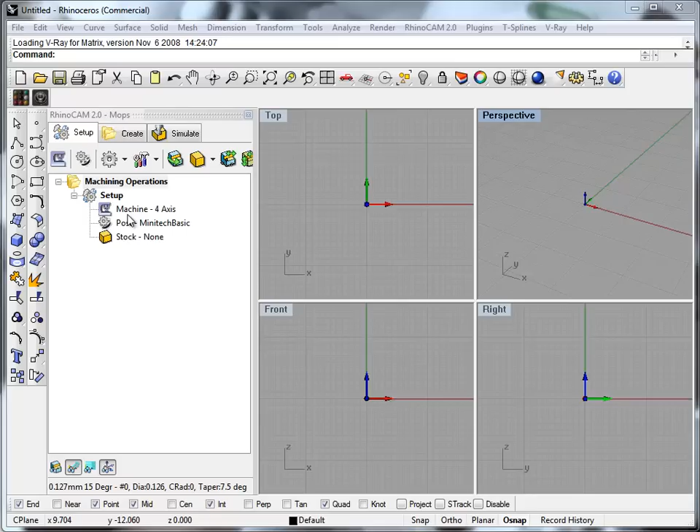Hi Brian, just a quick little video for you because I know that you'd probably be a little bit daunted trying to set up RhinoCAM on your own there up in Canada. I've just literally reinstalled this on this machine. It didn't have it on yet.

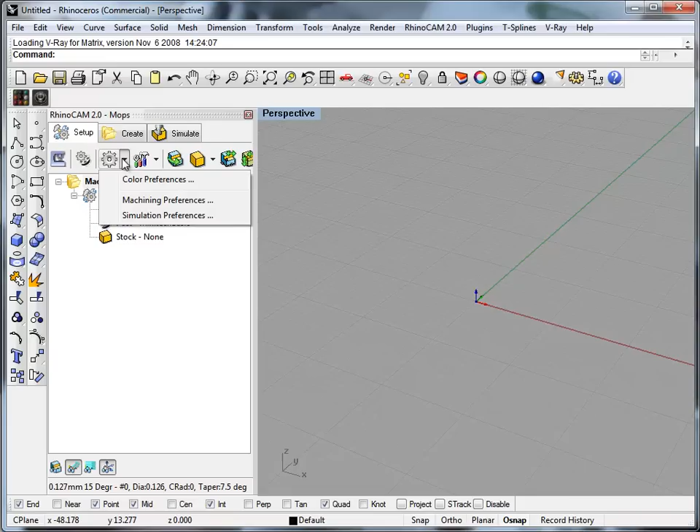My wife runs all my pathing stuff, so I don't even know if I've got tools set up in here. Do I have tools set up in here? No, I can't even remember where to find the tools. RhinoCAM cutting tools browser. Alright, so I've got the same tools in here that my wife would have sent you earlier today. So you obviously, I see from the forum, you figured out how to load them. Now, that's one thing giving you all the tools, but without telling you what it is they do or how they work, it's not teaching a man to fish, it's giving him a fish.

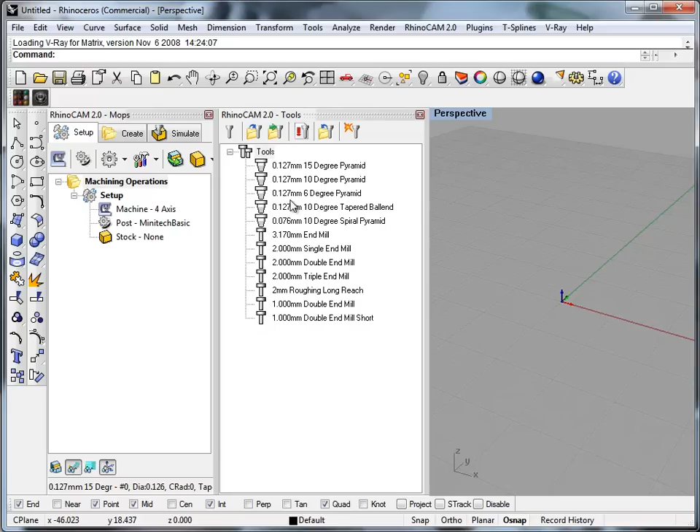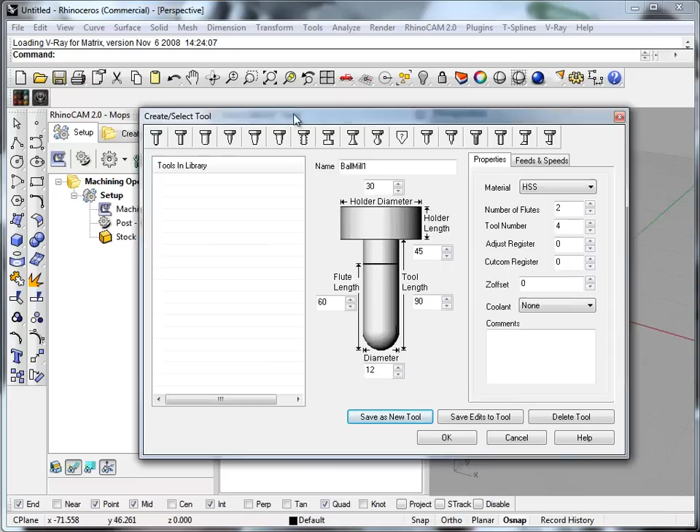So let's have a look at creating a new tool. Now you have to bear with me because I haven't done this in ages. So let's go there, create a new tool. Let's start again. So in your tool browser, that was the first little guy over there, create or edit tools. And when you pull this up, notice that on the top, you've got a whole heap of tool types, including one with the question mark, which is a user-defined tool, in case you buy something that's not up there.

For the large part, you're going to be working with flat end mills, round end mills, and tapered cutters with flat ends, or tapered cutters with round ends. The tapered cutters with flat ends and the tapered cutters with round ends, I define them as one type of tool. I don't even bother to define the fact that it's round. And if there's anybody else who's not a jeweler watching this video, stop watching now, because this is recorded for somebody who's going to be cutting wax. There's a lot of tolerance and a lot of leeway in wax that there isn't in metal, and this is not a setup video for people that are cutting metal.

Alright, so let's have a look at the first tool. The first tool, if you hover your mouse over it, will tell you that's for a ball mill. Basically, a ball mill is a straight tool that comes down dead straight. Its end terminates half round like this, and it can have flutes. Now what we mean by a flute is the cutting edge that faces down, and the cutting edge up the side. There's like a spiral that travels over. How many cutting edges are there? So that's the number of flutes that we're talking about. And you can determine these over here.

Most of the jewelry ones that you're going to buy in these type of things are going to have 3 flutes. If you're working with plastics, you'll cut stuff with 1 flute. Different metals, you'll have different numbers of flutes. Most of the time I don't even bother to set this up. You must remember that this software was designed for people who have far more demanding needs than us as jewelers. We cut wax, doesn't really matter how many flutes you use. This kind of tool will typically only be used as a roughing tool anyway.

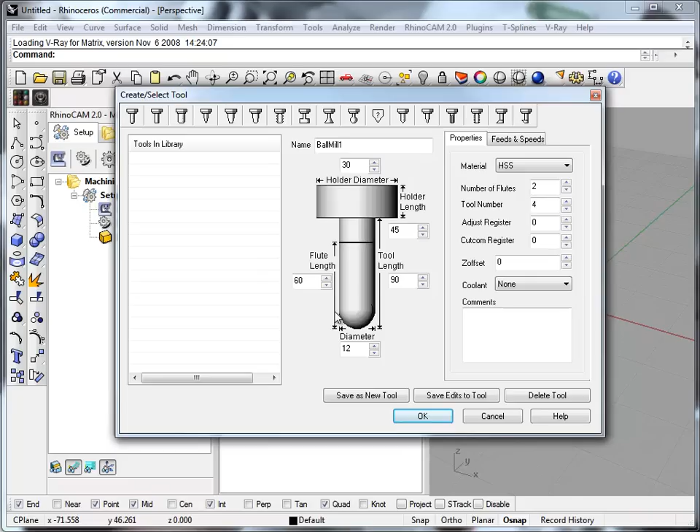So the tools that I set up like this: I have a 1mm ball end, I have a 0.8 ball end, and I have a 3.17mm ball end. There's my 3.17, and the rest are not in there. Alright, so let's define one quickly. Let's have a 0.8mm ball end. The holder diameter is sort of like how big is your chuck. I don't ever bother with this up the top here. I don't care. The first thing to start with is, I'm going to call this 0.8mm long reach ball end.

The difference between long reach and standard is long reach has just got a lot more cutting shank available, which is handy for us, because we cut wax, we can go in a lot deeper than most other people. We also need to reach deeper areas. You'll see when you start buying tools what the difference is between them. I'm not going to confuse you too much now. Holder diameter, I've never bothered to fill in. Holder length is how deep down is your chuck set.

I've never bothered with that either, because we jewelers cut really small pieces that are never more than maybe 30 or 40mm radius from the center of your rotary face. So this info here really is for guys cutting engine blocks, where the whole head of the mill is going inside of a block of metal and it's cutting areas, and RhinoCAM needs to be able to stop collisions with the actual drill, the spindle, and the spindle mount, etc., colliding with anything.

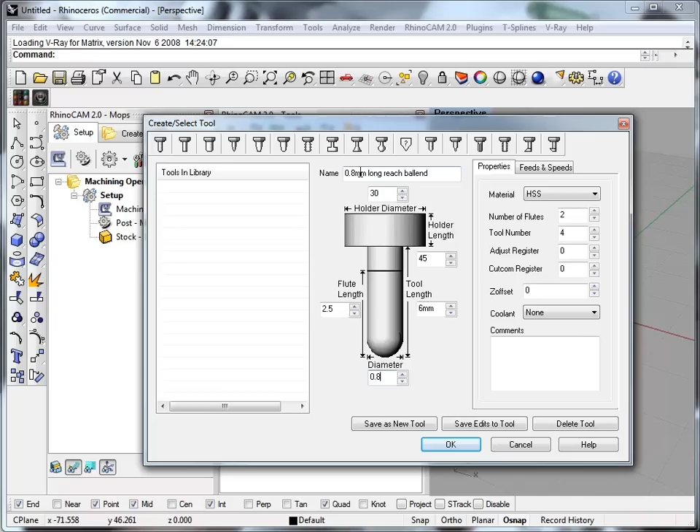Okay, so I'm going to try sketch out what I've done over here. Let me move this over. I can't work two windows at the same time. Let me see if I can fire up another instance of Rhino.

Hello, Rhino. Hello, another Rhino. Give me another Rhino. Oh, no. No, it doesn't matter. We're just going to draw on it.

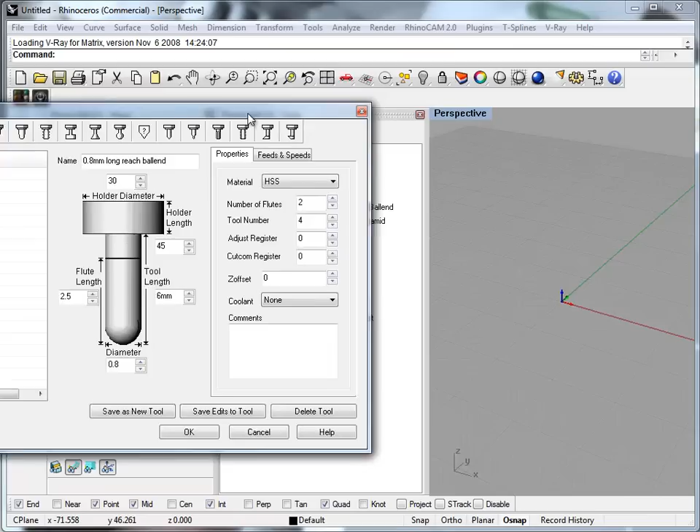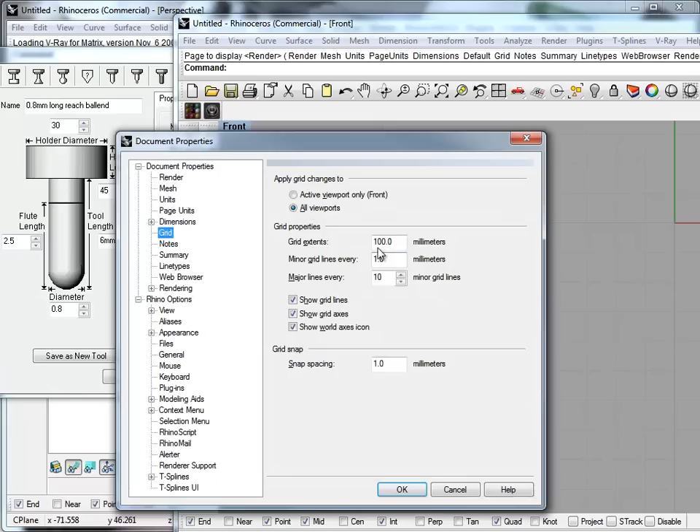Okay, so I'm going to grab this and just move it out there so we've got some space in the video. Then I'm going to work in the front view and draw what I've done over here. I'm going to take a line and draw. Let's put on snap. Let me set my snap settings. Sorry, it's a new machine I've set up, and I'm not entirely sure how everything was set. Snap settings, make it

0.25 millimeters. Okay, snap back on, and let's draw a line from this 1 millimeter interval. So I've said my cutting length, flute length, is 2.5 millimeters. So 1 millimeter, 2 millimeter, 2.5. All right. I terminate that line there, and I said my total tool length was 6 millimeters.

Okay, so I'm going to go from here. That's 1, 2, 3, 4, 5, 6. Alright, now what I was explaining to you before is that because this is a long reach cutter, let's draw another line, it actually looks something like this. I'm going to draw a line, both sides from there,

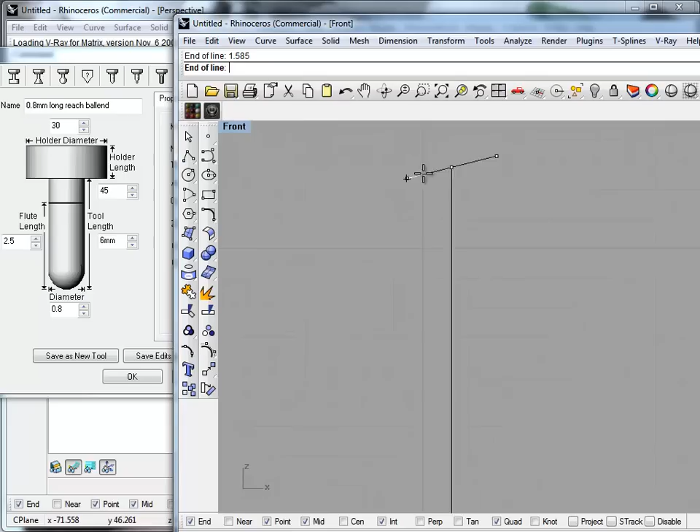1.585. Why am I going 1.585? Because 2 times 1.585 is going to give you 3.17 millimeters. So the shank on this guy is this wide. It comes straight down. Let's take a line. It comes straight down until it hits round about this area here. Okay, I'm going to draw a line both sides from here. 0.4 millimeter, because 0.4 is half of 0.8.

Alright, so the cutter width is this wide, then the cutting area comes up from here, so let's draw a line until it gets to this point, and then over here it runs out of teeth, so to speak. Then from here, it doesn't want to let me, well, okay, so from here there's a half round point, which is this. Then it goes up for 2.5 millimeters where there's actual cutting thread. I'm going to draw that to represent the lines for you.

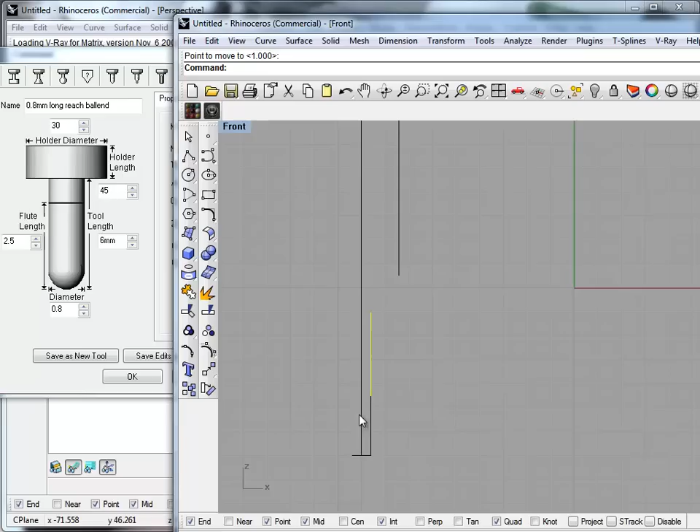So this is your representation of your cutting teeth on this thing. Let's say something like that. And the cutting teeth actually stop round about here. Then there's clean shank. I don't want to confuse you too much, so I'm actually going to draw a little arc over there. Okay, and that arc actually sits at this point.

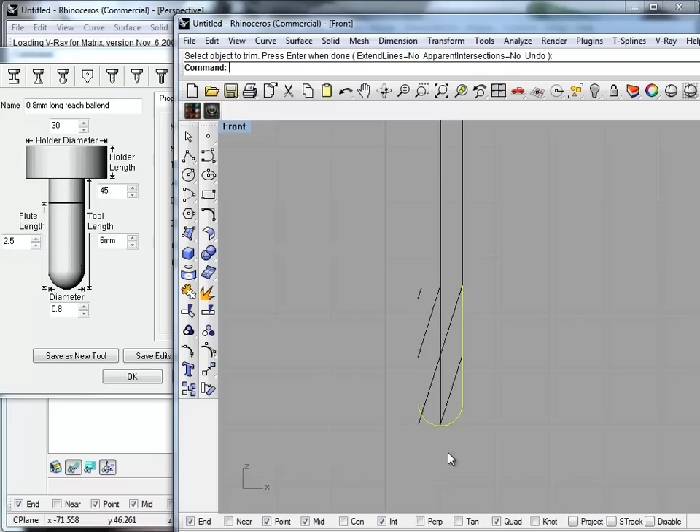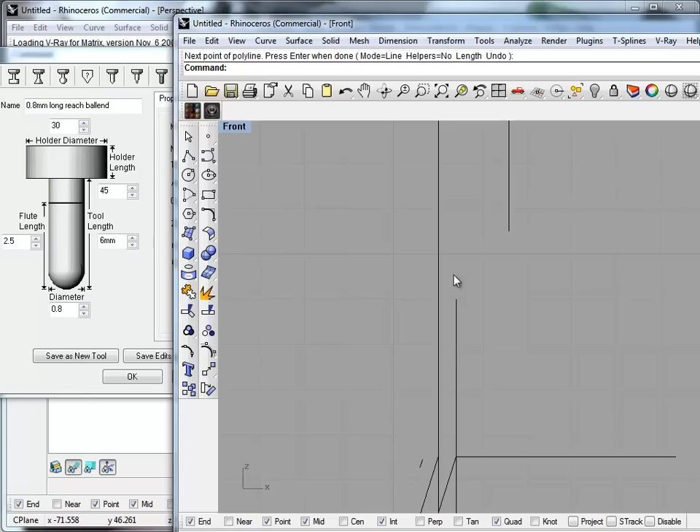Okay. Now, what's happening is, this is that tip over there. Let's draw a line to remind us where our cutting edge ends. So that's the end of our 2.5 millimeters. Then there's a straight shank area that comes up here, and then there's a radius section that comes out something like this. All right. And your tool looks round about something like that.

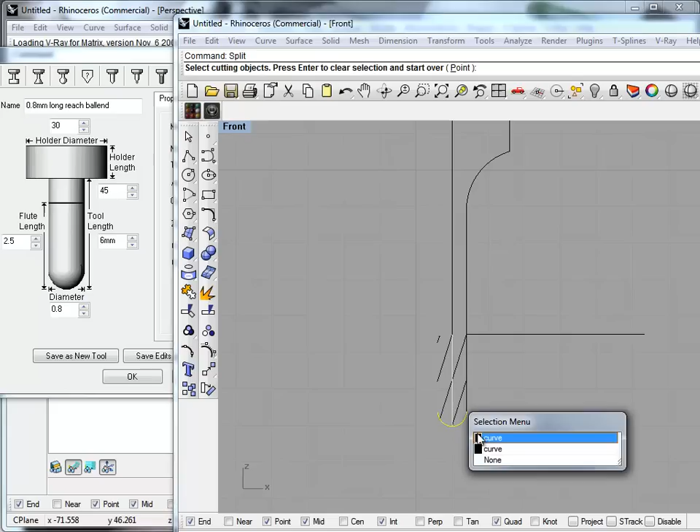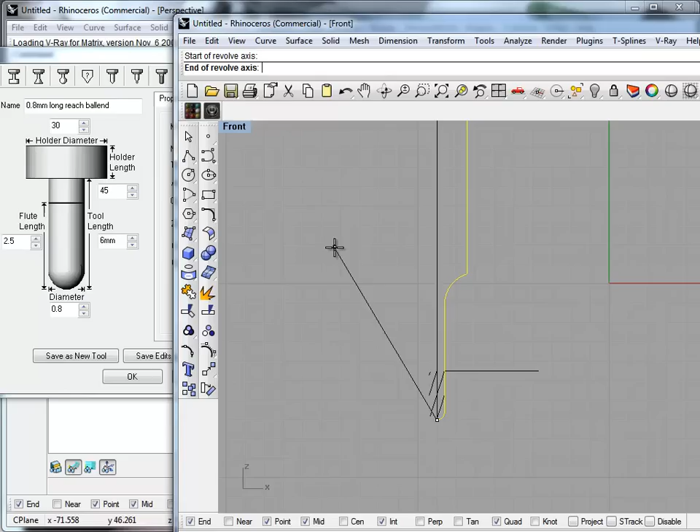So I'm going to grab this guy. I'm going to split it with that. Okay, chuck away that bit. Sorry, didn't see there wasn't anything on the bottom there. Split you with a point. Thank you, and delete you. So let's grab you, and you, and you, and you, and you, and revolve. And there, and there. Alright, let's just go to ghosted mode,

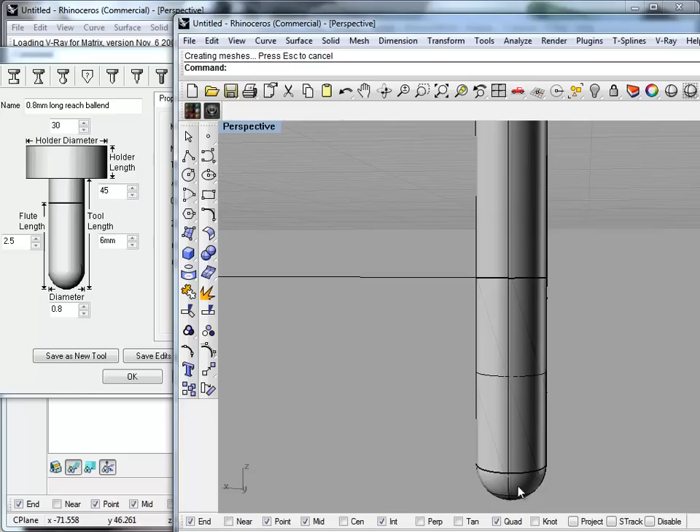so what you've got is a cutter that looks something like this. The shank of the cutter comes down plain with nothing on it. It keeps going plain for about that long. Then the last 2.5 millimeters have cutting edge on it, and then it has a ball end. So to get back to where we were, what we've said over here is that our total length from the tip to where we hit this area here is about 6 millimeters.

If you make this longer for a tool whose tip is narrower than its shank, what's going to happen is RhinoCAM will find a cavity that's say 0.9 millimeter or 1 millimeter wide, maybe 7 millimeters deep, and it will look at this and go, oh, you've said 20 millimeters, so I can safely plunge this tool down 20 millimeters into a cavity that's only 1 millimeter wide. Of course, what will happen is this section of the tool will destroy that.

So when you're defining tools, always be aware of whether the actual tool section is narrower than the shank of the tool, how long the cutting length of the tool is, and in here, that's what these little guys are denoting, right? So the diameter is, well, it's the diameter. You can't really go wrong there. You just look at the tool when you buy it. If it's an 0.8 long reach ball end, it's 0.8.

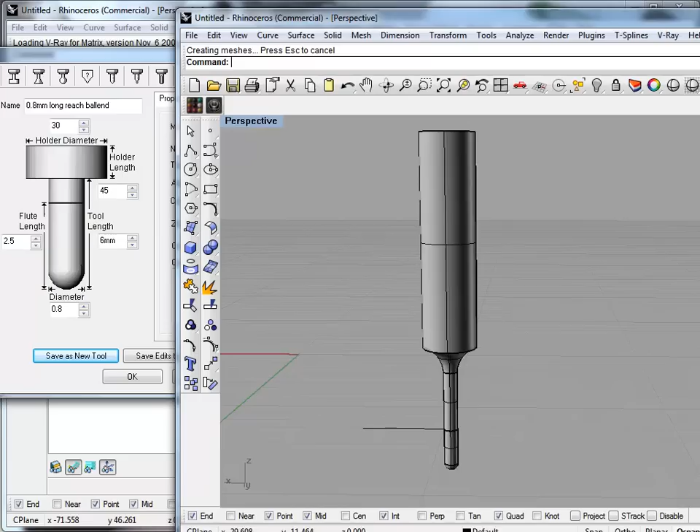Do sometimes just throw a vernier over it and double check that measurement, because there's tool suppliers and there's tool suppliers. Some of them will say 0.8 and it will be 0.7, others will be 0.89. Can make a difference when you've got high tolerance parts. Okay, so the flute length area that we were discussing is this over here. So let's highlight those. That's the cutting section that will actually cut. This section here will just slide along the wax.

If you set all of this as cutting area, it may bring this up against a block of wax and try to cut the side, remembering that these cutters are designed to not only cut at the tip, they're also designed to cut along the flute length area of the tool. So if you told RhinoCAM to go in next to a block of wax and face a section of wax, and you told it that this cutting flute length was all the way up, it would run this section against the wax, and all that would happen is the wax would superheat and melt against the tool, and your part would be destroyed. So don't over define a tool if you don't necessarily have to.

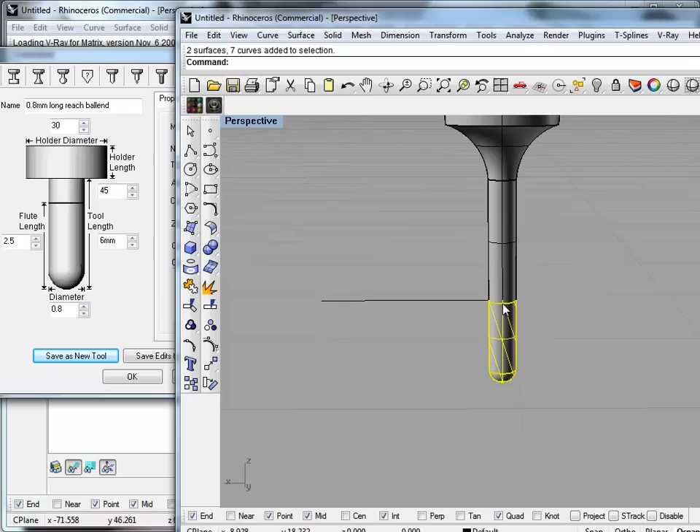Okay, so the flute length will also be on the tool packaging, or you can just take a vernier and measure where the cutting edge of the tool ends and pop that in over there. Alright, so you've now given it a name. We know what all the rest of this is. These top two over here, I've never bothered to fill in.

These sections over here are a little bit critical depending on what you're doing. For this video, I've particularly grabbed one where the cutting tool is smaller than the shank of the tool, because these are a little bit more problematic to set up than regular tools. Alright, so you would go save as new tool, and you would save your library out. So let's move on to the next one.

We have a flat end mill, which really is exactly the same as a round end mill, except that it's flat. Okay, same rules apply. You've got the same tool lengths to qualify. You've got the same diameters to qualify, same flute lengths. Let's have a look at some that I've drawn.

So in my 317 end mill, which is pretty much a standard end mill, I think everybody on the forum would use them, I've defined a flute length of 15 millimeters, a tool length of 25, which means this can go in 25 millimeters, 15 millimeter step downs when it's doing extreme roughing. Alright, my diameter is 3.17 millimeters, which is what the tool is. That's a 1/8 for the Yankee Doodles.

You could go in and fill in flutes. Technically, my tools have 3 flutes. Couldn't be bothered, I'm cutting wax. Okay, when you're cutting hard metals, this can be critical in determining whether a tool burns out or not. For wax, doesn't really matter. Alright, let's have a look what we've got over here.

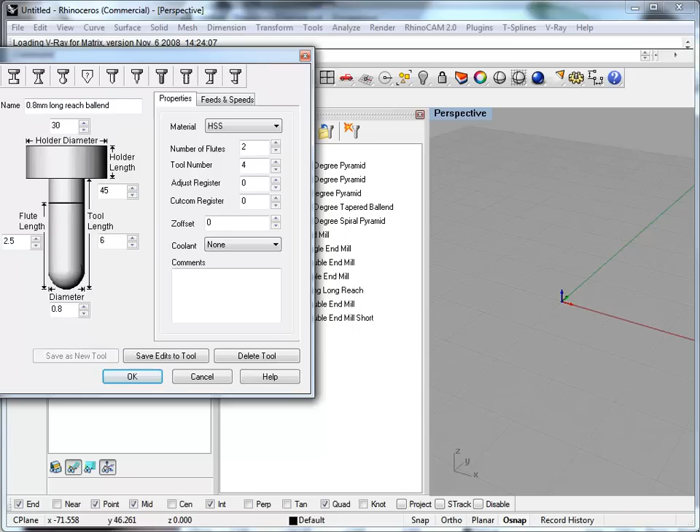A corner radius mill. Now, what the hell is the difference between a corner radius mill and a half round? I suspect that this one is completely half round. A corner radius mill, which I've never used, is a flat tool with a corner that's radiused off. What have we got going in over here? A V-mill. This is an engraving cutter. I don't think at this point in the game you need to worry too much about these. Chamfer mill. Oh, this is an interesting looking fella. I don't know that I've worked with this one before, have I?

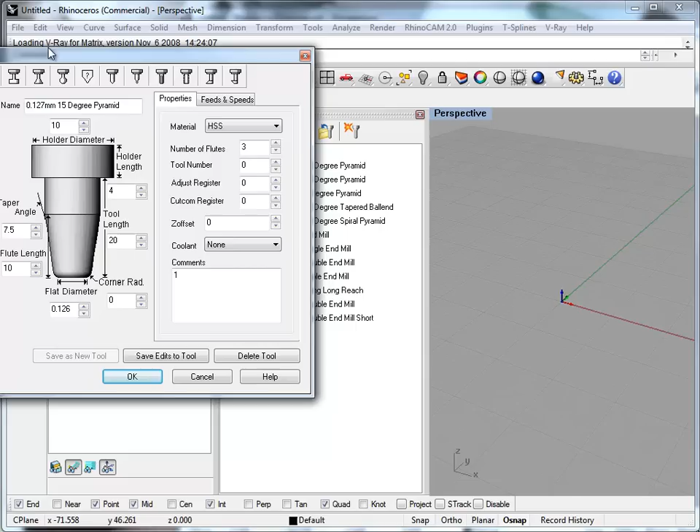Now, the one that I use the majority of the time is this. What do they call it? A taper mill. Now, most of the cutters that you're going to buy from Bits and Bits have a 3.17 millimeter shank that comes straight down, and then the tool tapers at an angle to a point in the front, or what looks like a point. And this will probably be what you will be using the most when you're working with RhinoCAM. You'll be working with probably 15 degree 0.127 millimeter cutters.

So let's have a look at defining one of these. In my particular library, you can tell what I use. I don't bother with finer cutters because really I don't have the need for them. The finest cutter I use is a 3 thou cutter, a 0.076 millimeter 10 degree spiral. I have some 6 degrees somewhere, the 0.127s. The 6 degrees I only use when I'm doing really fine walls.

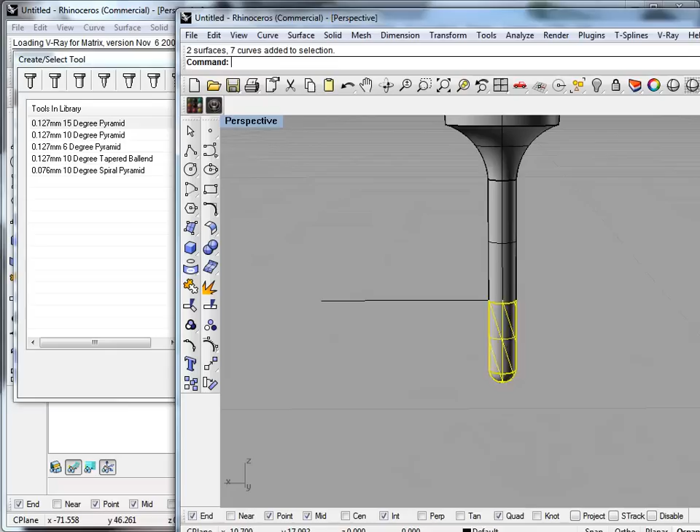Now, before I define one of these, what I might do is just open that other Rhino window and explain to you about a cutting tool and walls and why there's different degrees in there. So let's get back in here and let's delete all of this. Okay, and let's get in the front view. So I'm going to draw a line from F4 straight up, like so.

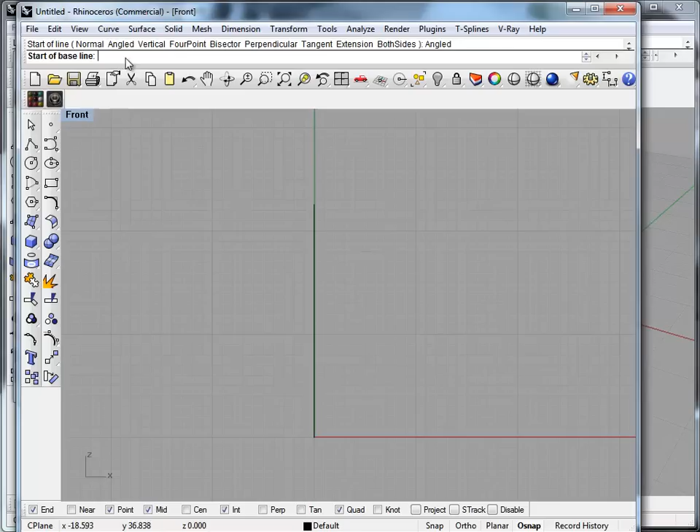Alright, I'm going to draw a line, angled, start of the baseline, end of the baseline. The pivot angle I'm going to make it 5 degrees, and what this is doing is it's drawing a line angled to that line at 5 degrees. So I'm going to have to come out quite a bit. What are we? 1.585, about there somewhere.

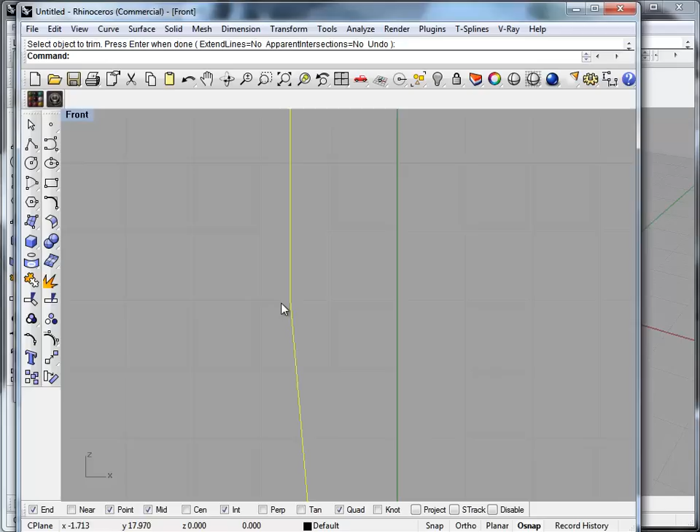Alright, and I'm going to draw another line from there, both sides 1.585, which is my cutter shank thickness. Let's put the two over each other. There, about there. Alright, and let's draw a line from where they intersect, straight up. Okay, so that was probably the worst designing I've ever done. Anyway, not important. Let's grab these two and join them and revolve them from F4.

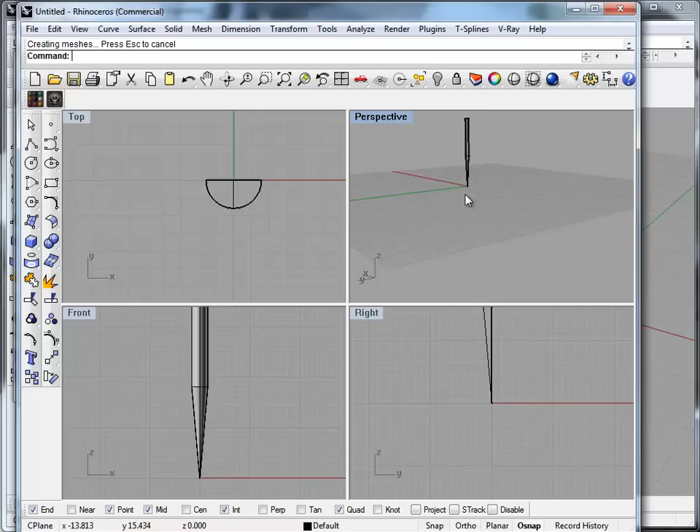Okay, so what I've just drawn is a 10 degree cutter. Now when you buy these tools, you're going to see them often referred to as 10 degree or 5 degree or 6 degree. When you buy them on eBay, it will confuse you because sometimes on eBay they don't define it the same way we do. Bits and bits happily use the way that I'm showing you now. 10 degree is the total angle, alright? The angle from this area to this area.

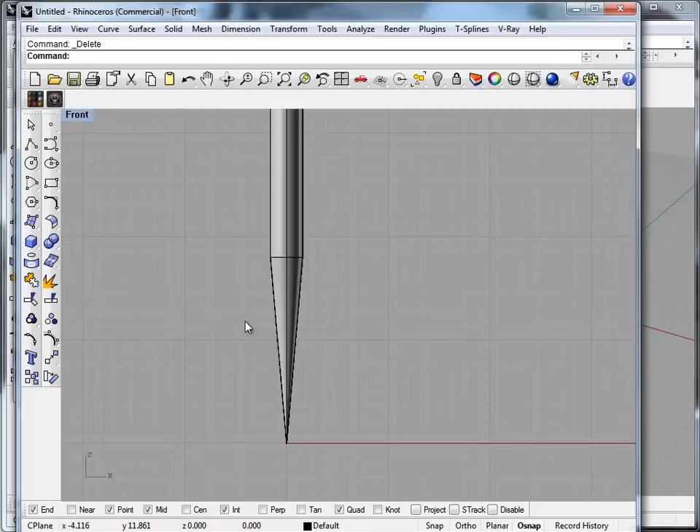Have I got some lines over there? Whoa, DupEdge. Let's grab that edge and that edge. Alright, and let's grab you and you. Explode you. Alright, grab more top here and dump it. Have we got any duplicates in there? Yeah. Alright, I'm going to hide that so we can have a look at what it is we're doing.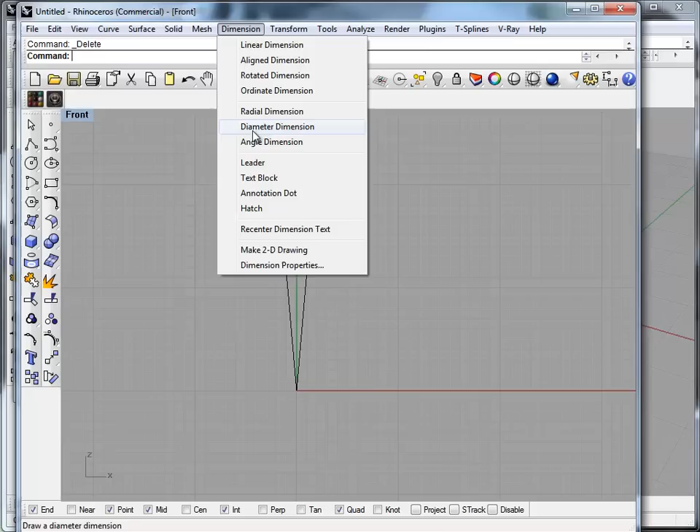Okay, so you remember when I drew this, I drew a 5 degree angle outwards and then I've revolved it around. So that means the total included angle here is 10 degrees. I'm going to do a dimension, angle dimension, select the first line and select this second line and put it in there. So what we have is a total 10 degree included angle from this end to this end. Okay.

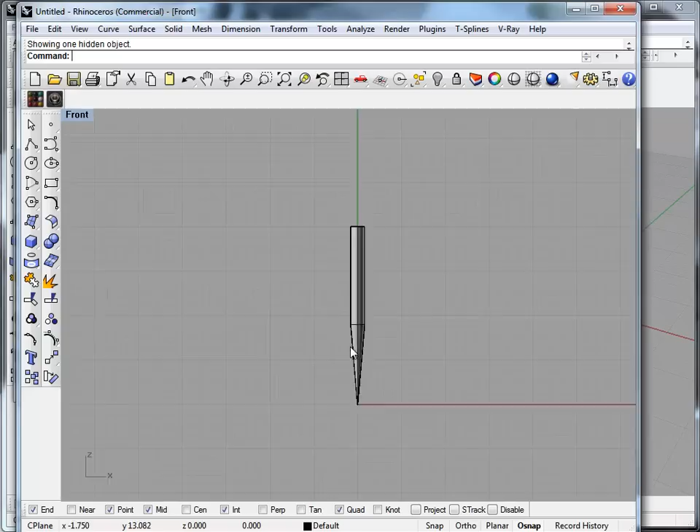The reason this is important is when you define this, it actually gets defined as a half angle, not a full angle. So I'm going to show that cutter again. Alright. So this is a 10 degree cutter. Its tip at the moment is infinite because it's in Rhino. Alright. I'm going to draw a line 0.127. Oops, start of the line, end of the line. 127.

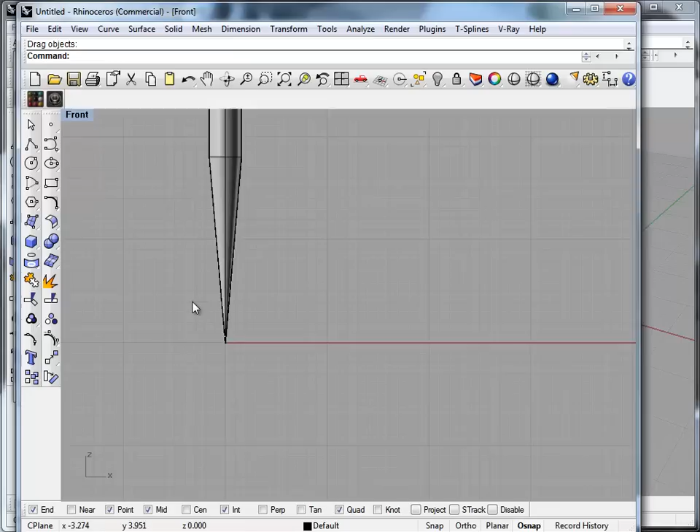Alright, so a 5 thou cutter would have a tip, say, yay thick. So when you zoom back, you can tell that all of these things look like they've got no tip, but at the end of the day, if you had a 10 times loupe or microscope and you zoom that up, this is what a 5 thou cutter looks like. So let's draw another line from here, shift tab outwards, 0.076, which is a 3 thou cutter.

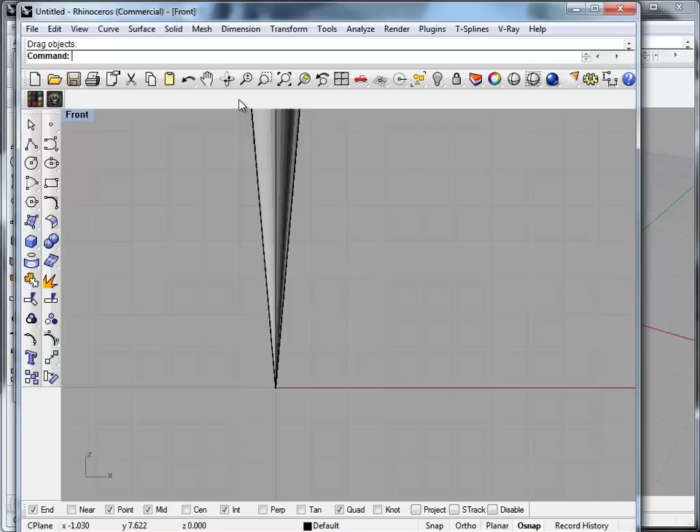Okay, so the 3 thou cutter's tip is a lot finer. It can get into smaller crevices. So a 3 thou tip, as you can tell, your flute area is longer. Where have they gone? Can't see where they are. There we go. Right. It can get into smaller places, but it also means that because it's thinner, it can break easier. You can get them all the way down to, I think, 2 thou. I'm not 100% sure if those are available yet or not.

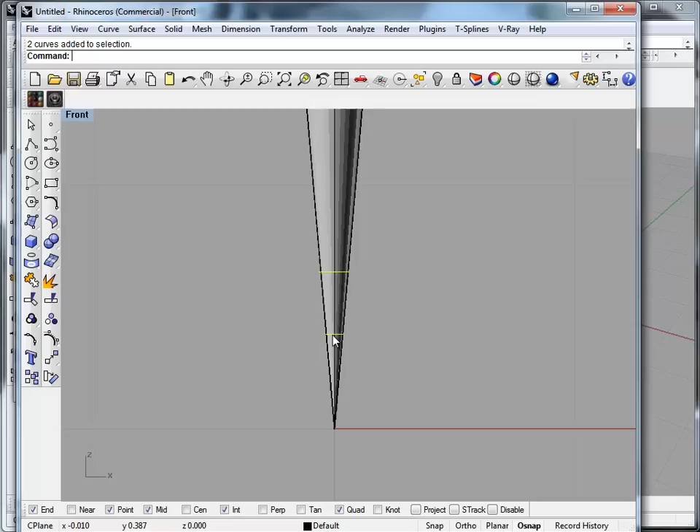But typically this cutter over here, which is the 0.005, 5 thousandths, is what I use for 99.9% of the cutting that I do. When I do really, really fine stuff with high detail areas, I might jump in with this, typically for crest rings or signets or that kind of thing. So I'm going to dump those two lines now. Actually, I might not. I might just take this and split it, and we'll keep this for later. Split it with that. Alright, and this is our defined 5 thou cutter.

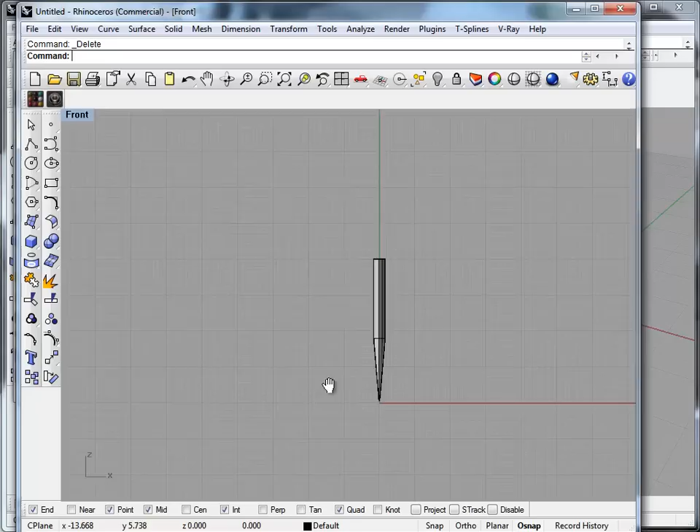Alright, so that's what that cutter looks like. It may have a slightly longer shank or not as long. So with the foreknowledge of what we got going on there, let's go back to defining this tool. I'm going to move it, say there, and pick this in front of it. Alright, so that's not going to work for me. No, sorry. We'll have to play back and forth a little bit. So again, what it's asking is, the first thing let's get out of the way is, what is the flat diameter?

Please hold 1 second, I've got to make a call. Okay, phone call.

Alright, so let's get the tip out of the way because that's the easiest one. We know what size that is. It's 0.127. I define it as 0.126. Buggered if I remember why. Alright. This particular tool we've got highlighted as a 15 degree. I'm going to highlight a 10 degree. Alright, so the flute length.

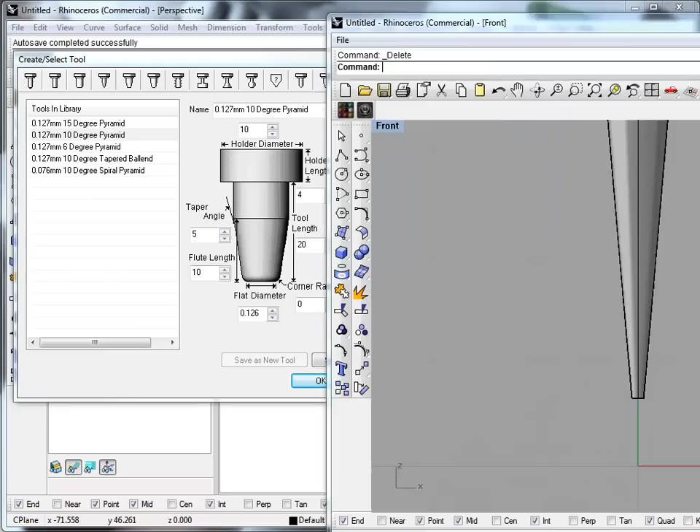Okay, so take a caliper and measure from here to here how long that cutting depth of the tool is. I don't know if it's dimensionally accurate or not, but mine is defined as being 10 millimeters long and the total tool length as being 20. So the total tool length in this case is from the tip here to how far this tool can go into the wax before it starts colliding with my holder. Alright, so I've got that defined as 20 in this case.

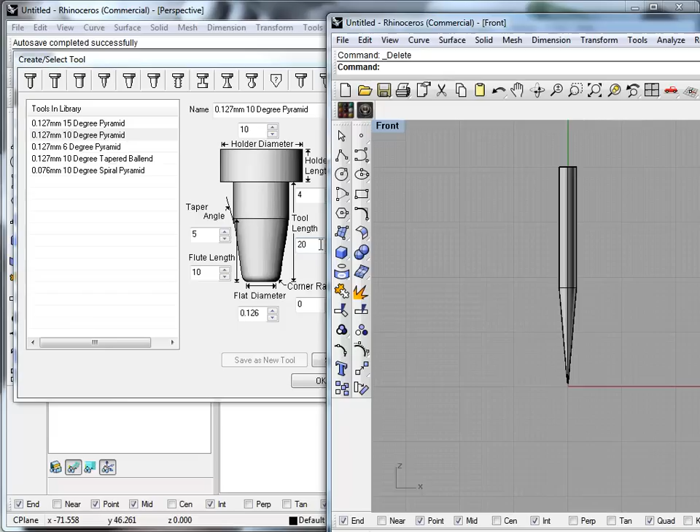The taper angle is where this gets confusing for some people. You will see I've got mine defined as 5. Have a look at, I can't zoom this up for you unfortunately, have a look at where it's asking you to define it. It's showing you a line here and it's showing you the tool angle there. So it's wanting to know what is the taper angle here.

That's not the total included angle, that's just the angle, which is half of total included angle. So that would be 5 degrees. In the case of a 10-degree tool, you'd fill in 5 degrees here. So 5 degrees plus 5 degrees will give you your 10 degrees that we were talking about earlier. And really, when it comes to defining tools, that's about it.

Okay, you're going to get the best bit in the whole world is a 10-degree tapered ball end mill. And you may ask yourself, how do I set that up? There's no ball end mills here. You can define that by setting a corner radii here. Okay. Should you do it? No, it's a complete waste of time.

Because all that adding this corner radii will do is it will make your tool path be really slow when you're generating it. It will also have depth issues because tapered tools with radius, there's something funky that happens around here. At the end of the day, the only difference between a regular pyramid flat and a pyramid with a ball end, when you're talking about a size like this, 0.126, is the fact that one's going to give you a better finish than the other. Other than that, I do not bother to change the definition.

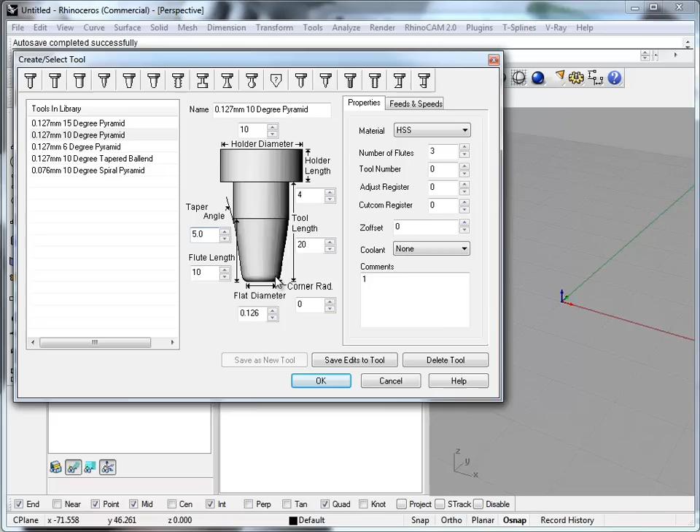Basically, you've got the tool in front of you. When you bought it, you know what the angle is. It's 10-degree tool, so your taper angle is 5. Your flute lengths, expensive tool manufacturers will give you all this info on the packaging, but otherwise just grab a caliper and measure. And just fill in the info as you need. Don't bother with corner radii in the case of these tools. And that's about it.